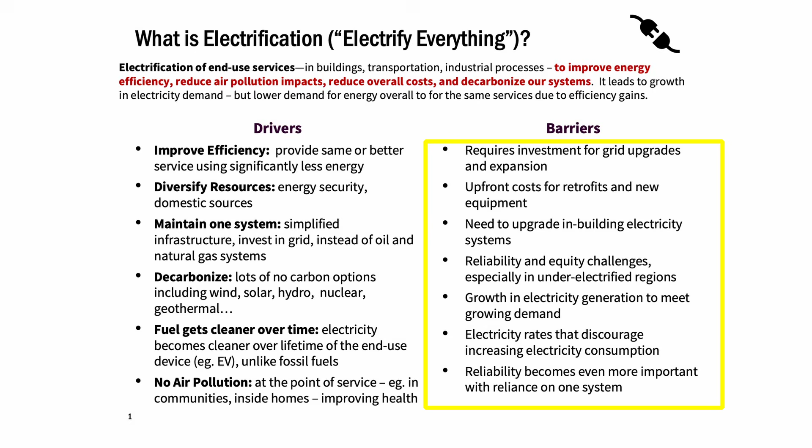We need to have a grid that is able to handle the expansion of demand with electrification, and that includes investment to the grid and investment for electricity generation. You have to do those expansions and upgrades because you're transferring that energy need from the fossil fuel resource to the electricity grid. A lot of times there's a lot of upfront costs, whether that's in the energy service itself or in upgrading the electrical system in a building in order to accommodate those electric appliances. So there's a lot of upfront costs.

Reliability becomes really important in terms of thinking about whether the electricity is available. Now we're relying on one system, so how available is it? Reliability becomes an important factor. And then another barrier is just the costs. Even though you're getting those efficiency gains, sometimes the electricity cost design is not optimal for making this the most cost effective. So it's important to think about how electricity rates are structured in order to encourage all those electrification benefits. We're going to go through all of these.

We're going to do it by going through two examples of electrification: one is heat pumps, and the other is electric vehicles. These are two big ones. I'm just showing you here, kind of thinking about the system.

The heat pump is a way of electrifying your heating services in your home, and heat pumps are much more efficient than natural gas furnaces or electric resistance heaters. This is an important way of electrifying and getting those efficiency benefits we just talked about. Electric vehicles offer the same kind of efficiency benefits through electrification. We now have an integration of all of these into one system with our renewable generation, our grid, and our electrified end-use services.

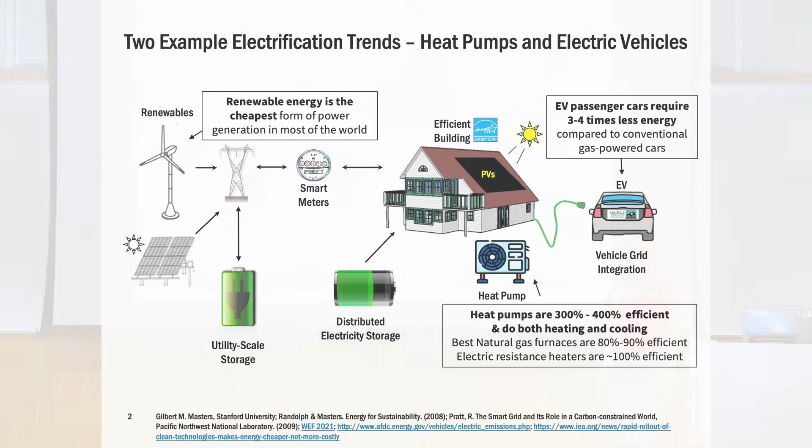So let's talk about heat pumps first. The heating needs for our buildings, both commercial and residential, are pretty significant. Here I'm showing you residential, where space heating is almost half of the energy use in our residential buildings, followed by water heating. Both of those can be electrified with a heat pump, much more efficient than their natural gas counterparts.

I've highlighted a couple other things that can also be electrified. You can use heat pumps on clothes dryers, and you can use things like induction stoves for cooking to electrify those services. You can see how big a piece the heat is, both for space heating and water heating. In commercial buildings, it's a smaller portion, but still significant and still the biggest in terms of space heating of our commercial buildings. It's about a third of the energy in those buildings.

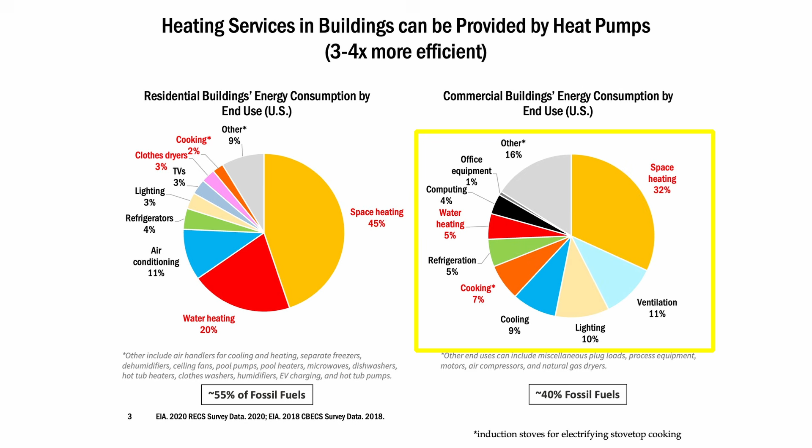So these are the places that we're still using fossil fuels within our buildings that can be electrified through a technology like heat pumps. So how does a heat pump work? I get this question a lot because, one, it sounds magical that it's 300 to 400% efficient. And how can it do it so efficiently?

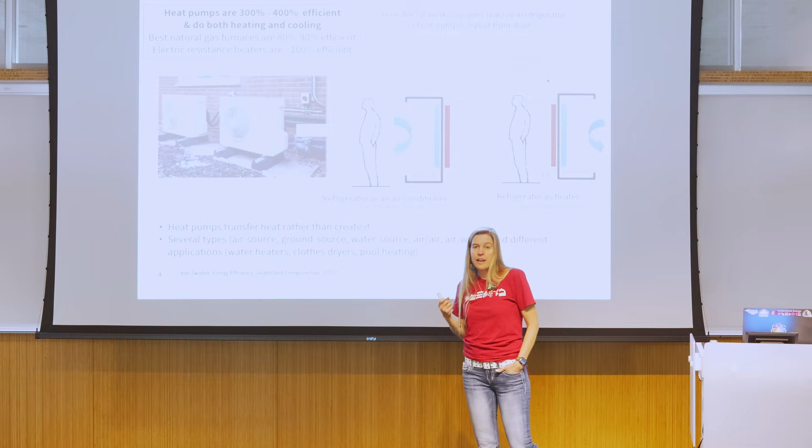The big thing to think about with a heat pump is that you're moving heat instead of creating it. You're taking heat out of a cold space and moving it to a hot space. We already use heat pumps - that's what air conditioners are, that's what refrigerators are. They are heat pumps.

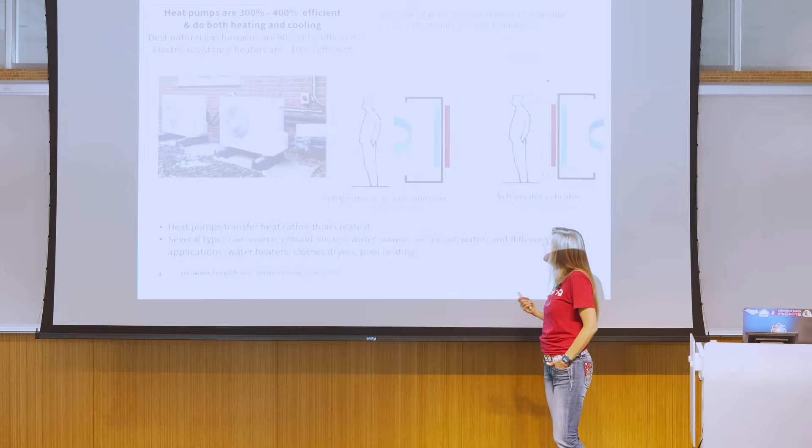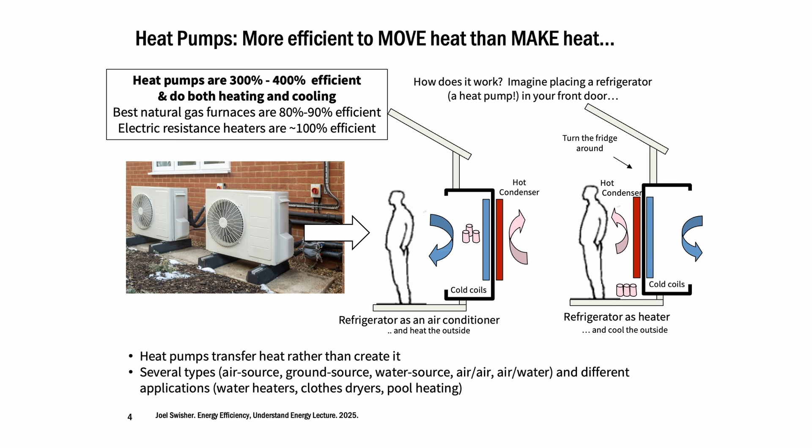If you want to think about a heat pump to heat and cool your space, you could just put a refrigerator in your doorway. If you open up the refrigerator, you're cooling your space. And if you turn it around, you're heating your space, because that's what the refrigerator is doing - it's taking heat out of the cold interior, which you just put your food into, and putting it into your warm kitchen. So this is a heat pump, but at much bigger temperature differentials than we're often using our heat pumps for, because we're trying to cool our refrigerator a lot.

The way that we do that movement of heat using electricity is by using some of the physical properties of a fluid. The important properties of a fluid are that if you compress it, it warms up, and if you expand and decrease the pressure on it, it cools down. So what we use is a refrigerant, just like in our refrigerator, to run this refrigeration cycle for our heat pump and move heat out of the cold space and into the warm space.

If we have a liquid that is low pressure and cold, it will evaporate as it warms up. You think about this liquid as colder than the air outside. So even though it's cold outside, this liquid is even colder. It's going to move heat from that cold winter air into the liquid and cause it to evaporate. So that liquid changes from a liquid to a gas. It's still a relatively cool gas, but it has drawn some of that heat from the outside - now it's a little bit warmer.

It's a gas. You're using your electricity to compress it, to push that heat - and that compresses that liquid, and now that gas is hot. So you compress the gas, it's now a hot gas. And you're taking it inside your building, and that is now hotter than the warm temperature inside your building. So you heat exchange it with the temperature from inside your building. That heat will move into the air in your building, so you're heating that air up.

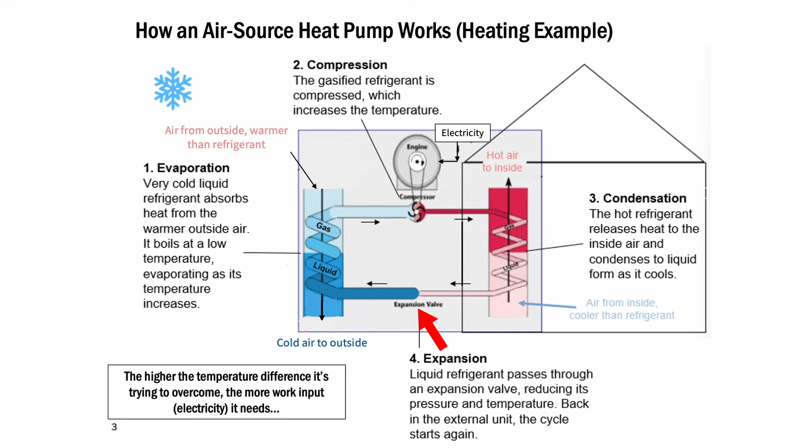As that hot gas gets the heat drawn from it, it becomes a liquid. It's still a relatively warm liquid, but it becomes a liquid. And then you run it just through an expansion valve - this doesn't take any electricity. You just run it through an expansion valve where you're decreasing the pressure on it again, and it becomes this cold liquid.

You can run this refrigeration cycle pretty efficiently with just electricity coming in, compressing and pumping the fluid around to move heat from the cold outside to the warm inside. A heat pump can do this the other way too, switching everything around so in summer you move heat from the cold inside of the building to the warm outside. An important aspect of heat pumps is that the higher the temperature difference it's trying to overcome, the more input it takes. A refrigerator trying to get really cold takes a lot more energy than trying to reach comfortable space temperatures, but it depends on your environment.

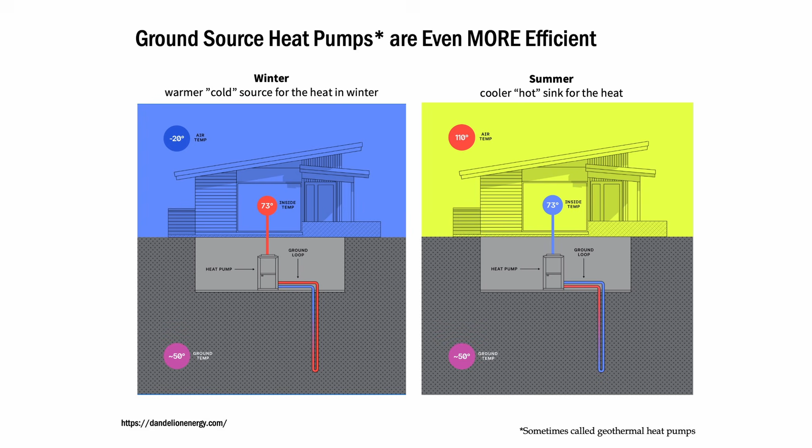You might have noticed I said air source heat pump. There are different ways to think about heat pumps and where you're getting that heat from, and if you can make the temperature difference less extreme, your heat pump becomes more efficient. With an air source heat pump, you're dependent on whatever the temperature is outside. You can also use a water source or ground source heat pump. The nice thing about a ground source heat pump, for both winter and summer heating and cooling, is that ground temperature stays pretty steady year-round, making it a better heat source or sink. In winter, it's much easier to take heat from 50-degree ground than -20-degree air, and in summer, easier to push heat into 50-degree ground than into 110-degree outside air.

A ground source heat pump, sometimes called a geothermal heat pump, is going to be a lot more efficient but also more costly. This is a challenge on the residential scale, but it certainly is an option that can make sense in certain climates.

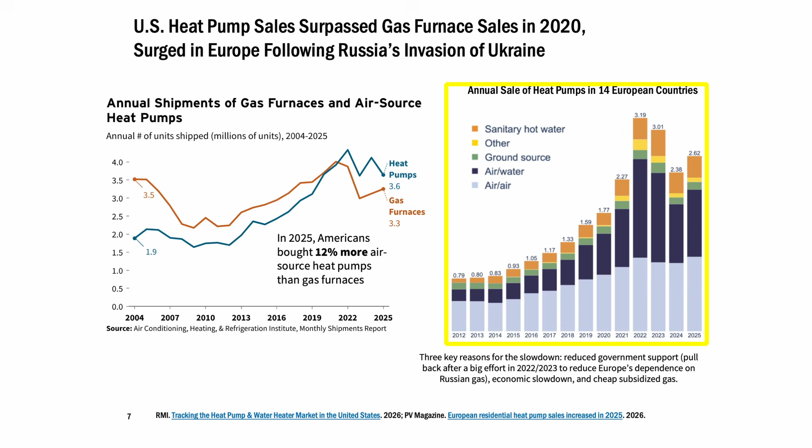So what's happening with heat pumps right now? We're seeing growth both in the US and other locations. In the United States, heat pumps are now outselling gas furnaces domestically, with the crossover happening in the last few years. In Europe, there's been huge growth in demand for heat pumps as there's been an effort to move household space heating off natural gas after Russia's invasion of Ukraine, to decrease dependence on Russian natural gas. There was a huge spike in heat pump demand right after the invasion, and it's still been pretty high in Europe.

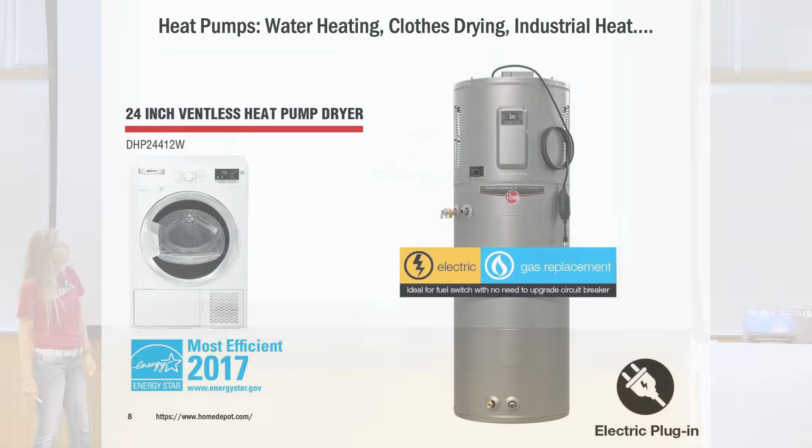We use heat pumps for other things too. You can get heat pump clothes dryers, which is another way of electrifying and making them more efficient than traditional electric dryers. You can also electrify water heating, remember that was the second biggest wedge on our residential chart. That can also be electrified with a heat pump, much more efficient than using electric resistance. So there are a lot of applications for heat pumps, electrifying and improving efficiency.

Other electrification options coming in include things like induction stoves, and of course we've long had electric ovens and things like that.

One of the challenges and barriers I mentioned was the upfront cost for upgrades. A lot of times a residential home won't have an electricity panel or system able to handle the electricity draw from these appliances, so you have to upgrade your panels, which can be very costly.

One innovation we're seeing from vendors is installing batteries within these appliances or within the heat pump, so the battery can serve as a buffer for how much power the appliance draws at any one time. This can allow a homeowner to avoid costly upgrades to their electricity system, because the battery ensures the power draw never exceeds what their system can handle. So we're seeing all these kinds of innovations to handle some of the upfront costs of electrification.

We can electrify all sorts of things in our house. This is an example of putting together the things we've just talked about, and reducing air pollution is one of the big benefits we get. We've seen a lot of studies show that, especially with stovetop cooking which is often around where people are, using natural gas can lead to pretty high indoor air quality problems and human health impacts from the pollutants of burning natural gas in your kitchen.

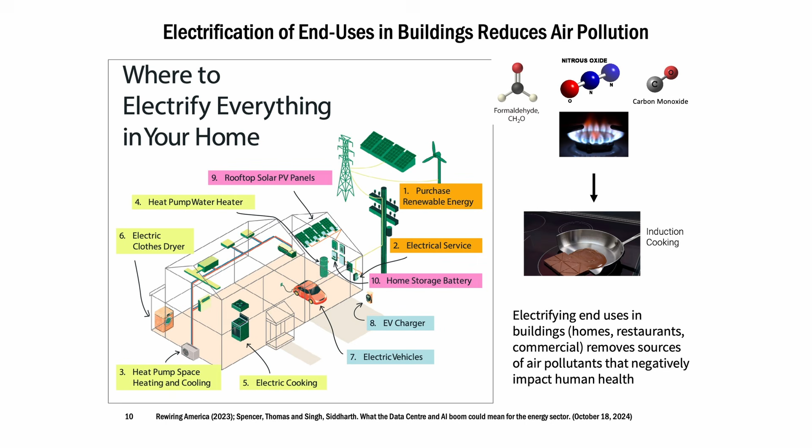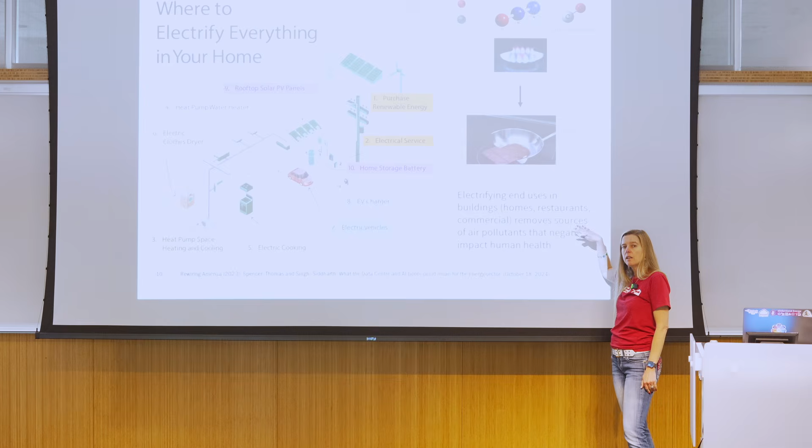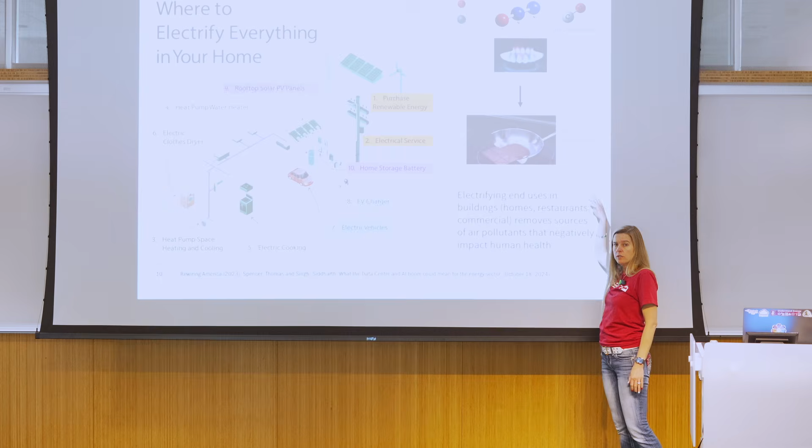Electrification using technologies like induction stoves is really great for removing that air pollution point source. It's really important, and we see a lot of benefits especially in restaurants, where people are working in the kitchen at the stove for long periods of time, every day, 8 hours a day. Electrification is really helping to improve the health impacts from the air pollution of traditional gas stoves.

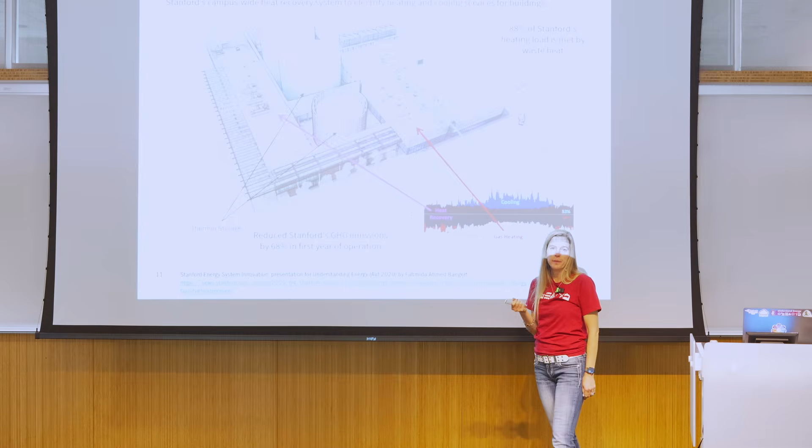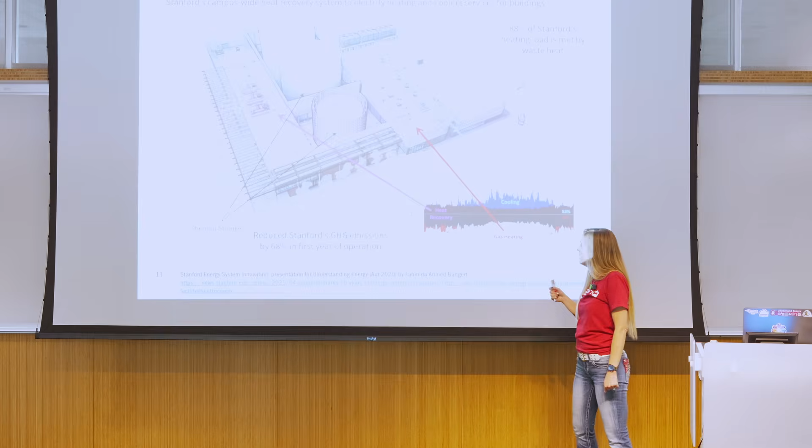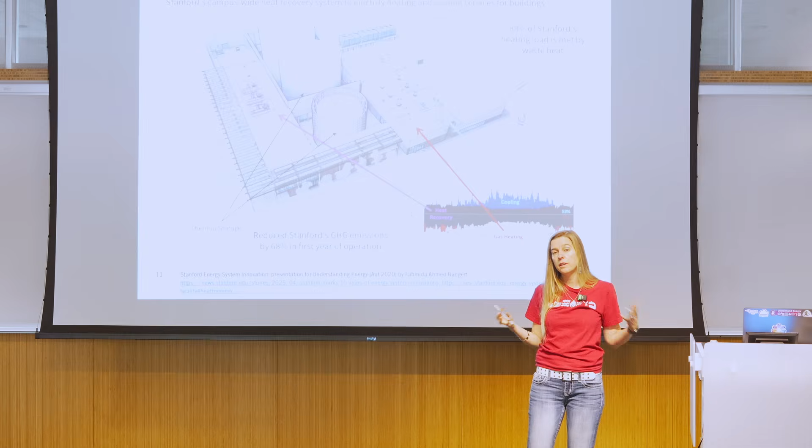Okay, a final example on a heat pump, at a grand scale here at Stanford. About a decade ago, Stanford installed a district-size heat pump where they're using waste heat from some buildings doing cooling to provide heating service to other buildings. What Stanford found is that buildings required both heating and cooling all year round, depending on the type of building, whether it's a hospital, a data center, or a lab space. They were heating and cooling buildings all year round, so there was an opportunity to move heat from the buildings you're cooling to the buildings you're heating. They did this at a scale that hadn't been done before at the time. This is called our central energy facility.

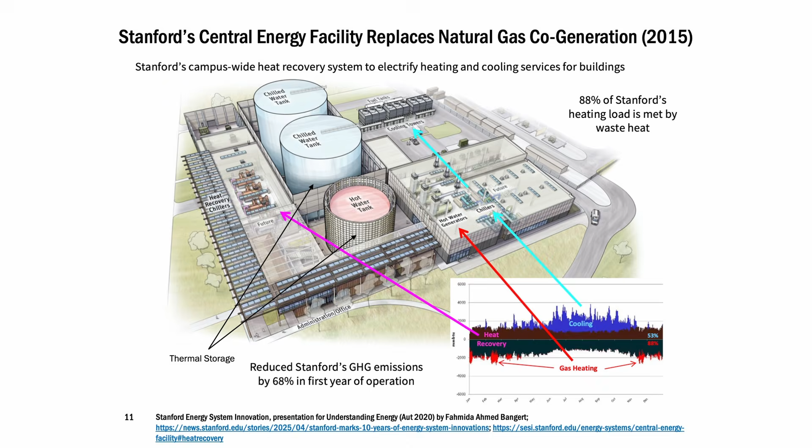There's kind of two big things. One, this is using waste heat to provide that service, so it's much more efficient, doing it like a giant heat pump. Two, they also have thermal storage, both cooling and heating, and that allows Stanford to be flexible about when the heating and cooling service is happening and when they have that heat available. So that thermal storage gives you flexibility in terms of nighttime and daytime and allows you to really meet this demand.

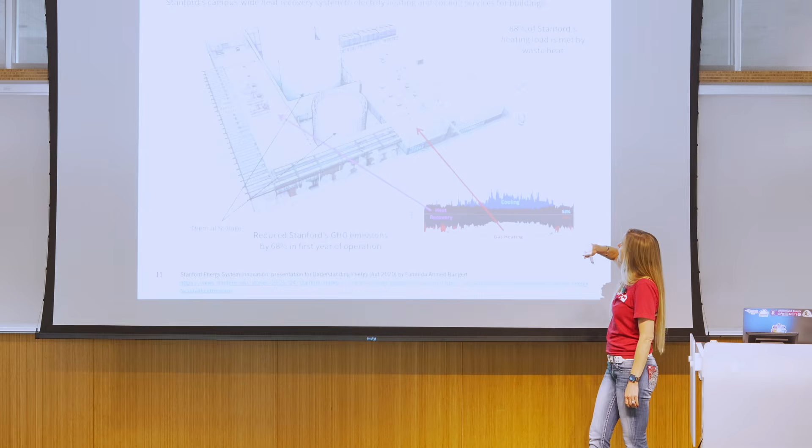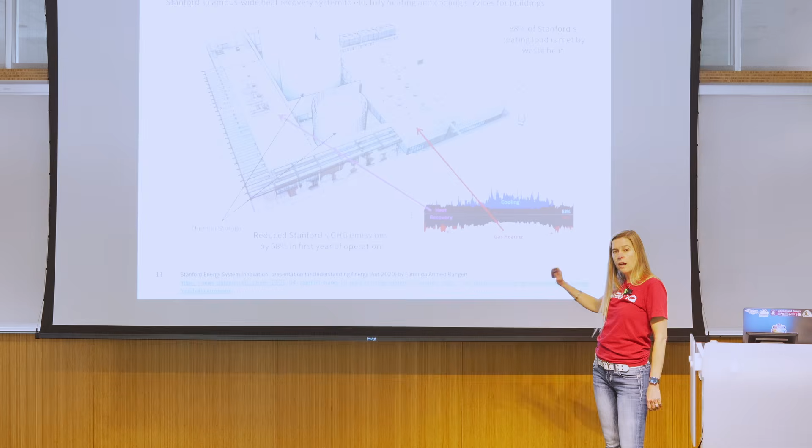Almost 90% of our heating load is now being met by waste heat at Stanford, and importantly, this really dramatically reduced Stanford's greenhouse gas emissions. So it can be done at the household scale, the building scale, or at the district scale in terms of heat pumps. Okay, so that's what I wanted to tell you about heat pumps.

I told you I would tell you 2 electrification stories. So now I'm going to tell you about electrification of transportation.

Electrification of transportation provides a lot of benefits, which we talked about. I often get asked, doesn't it matter what the electricity mix is on whether there's a benefit from an electric vehicle or not? The answer is yes, but the electric vehicle is so much more efficient that even on a grid powered by a coal-fired power plant, you would still get a benefit compared to its gasoline counterpart. And like I said, you own that vehicle for 15 to 20 years, so that grid, that fuel, can get cleaner over time as you go.

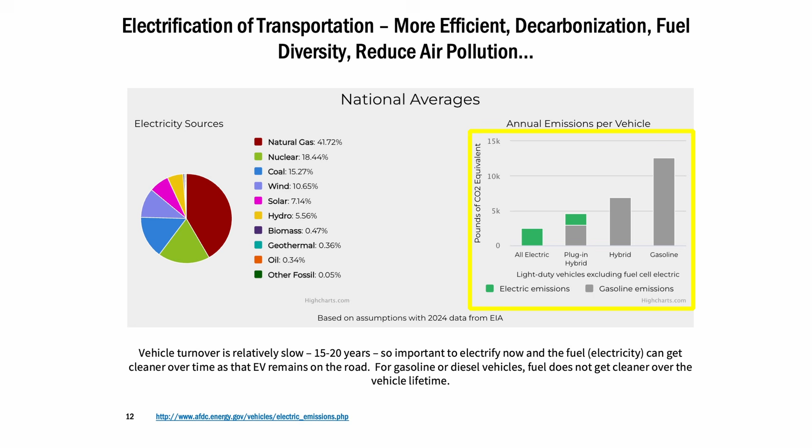Here I'm showing you the electricity mix just for the United States. This is a government website that shows how that electric vehicle powered by the average grid in the US would compare to its hybrid or gasoline counterparts. You can see even with a grid that's not decarbonized, you still get a lot of benefit in terms of greenhouse gas emissions for your electric vehicle. A big reason for that is the efficiency, it being 3 to 4 times more efficient.

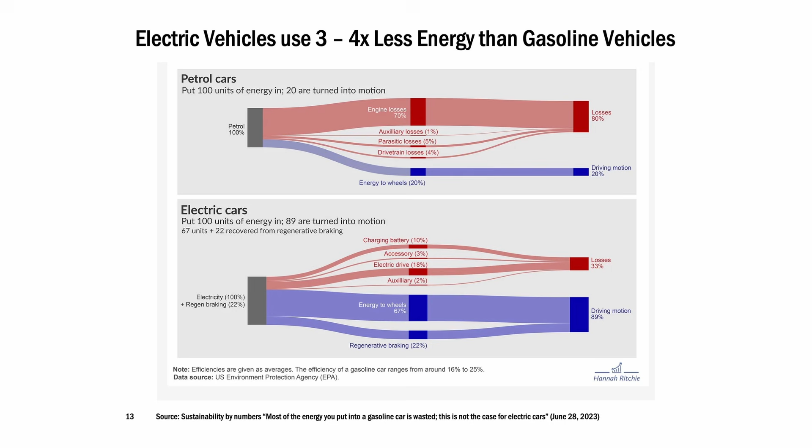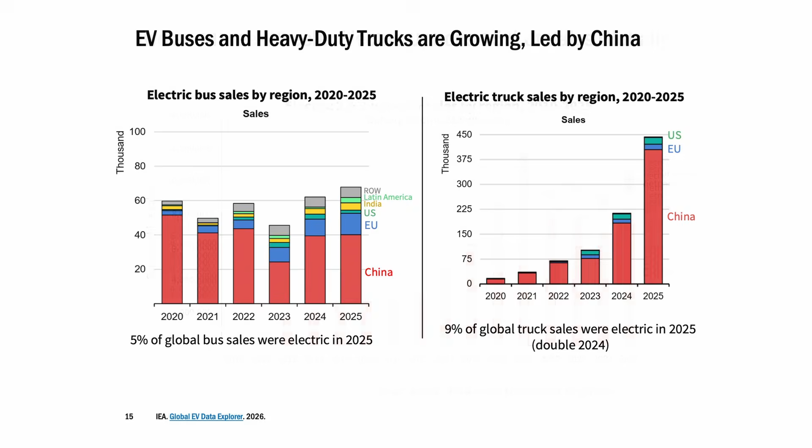Two-wheelers and three-wheelers, which are important in many countries, have seen a lot of growth in electrification. This is actually for on-road transport, and it's the most electrified segment in the world.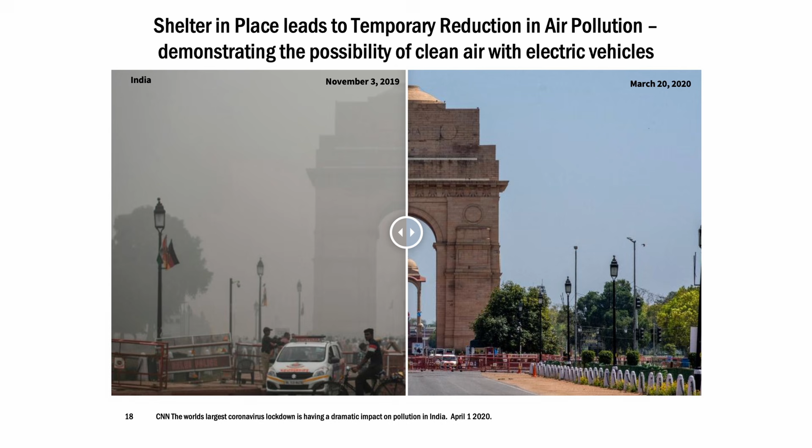What can that air pollution reduction look like? I think one of the things the pandemic really showed us was what cities could look like without air pollution. This is just one example in India, showing what the air pollution looked like on a typical day before the pandemic, and then during the shutdown. This is the possibility we're talking about by electrifying these end-use services.

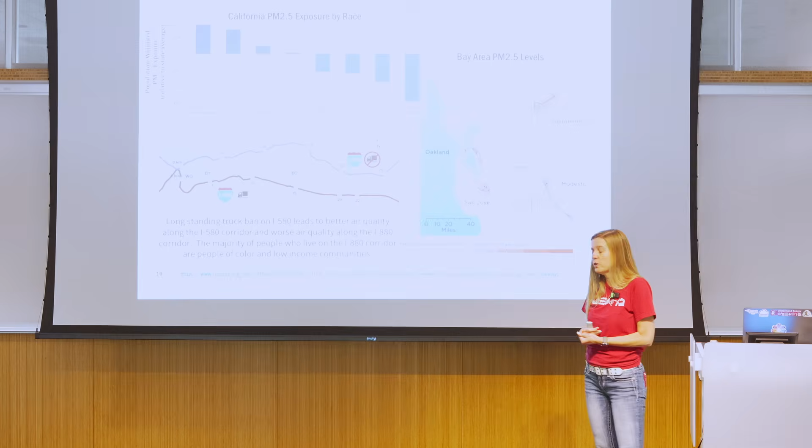Much of the pollution a lot of times is from our transportation systems. We also see disproportionate impacts from that air pollution, which again would benefit from electrification. I'm showing you here just one local example, but we see this everywhere, where communities along our transportation corridors are bearing the highest burden of air pollution from our transportation systems.

In particular, the particulate matter coming from our diesel trucks. So electrifying our trucks is a really important aspect of electrification in order to reduce some of these air pollution impacts. Here I'm showing you where the pockets of significant particulate matter air pollution from on-road vehicles are in the Bay Area.

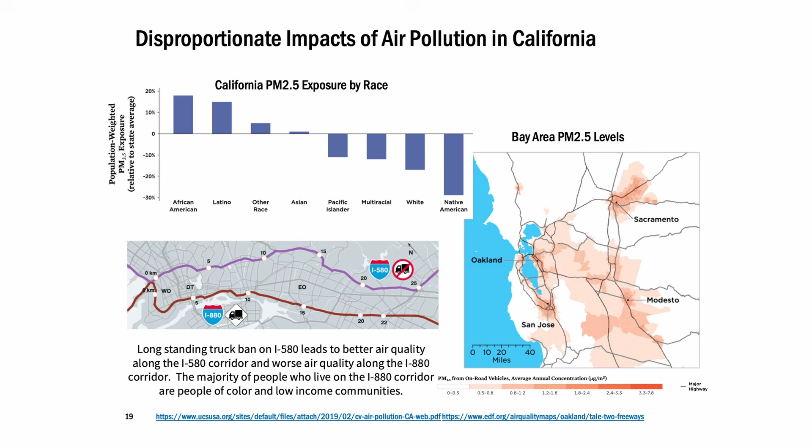It's really those highway corridors, which happen to be a lot of times our communities of color and our low-income communities. And so that contributes to this disproportionate exposure and impact for those communities from the air pollution from our transportation systems.

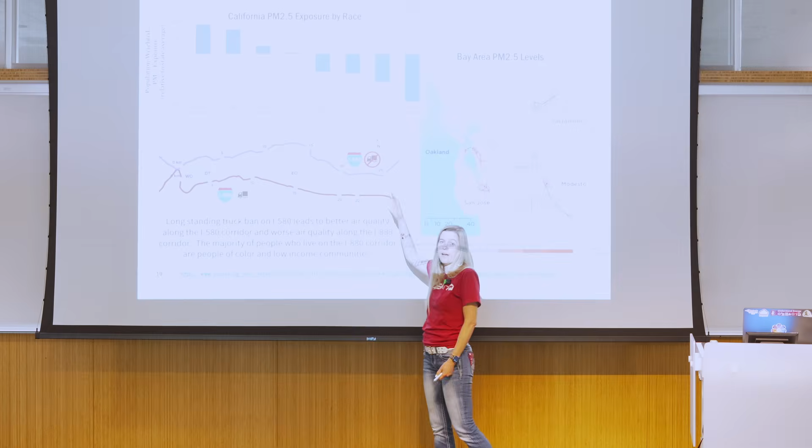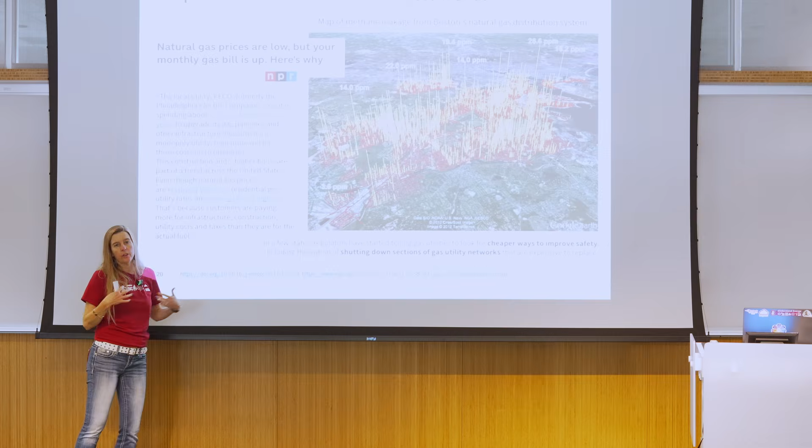Finally, I talked about how we could just have a single system that we are investing in for electrification. So instead of investing in both our natural gas system and our grid, we could just invest in the reliability of that one system.

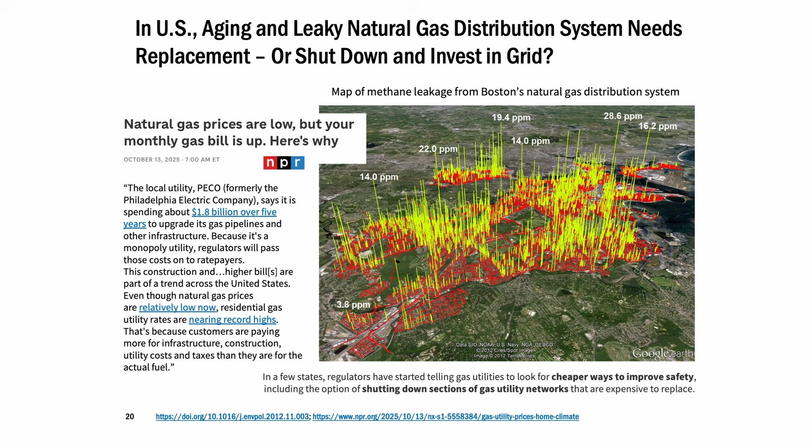This is just one example - there are many, many examples to think about - but in the United States, our natural gas systems are aging just like our electricity grid, and they need upgrades. So there are some places thinking: is it worth that investment to upgrade both of these systems, or does it make more sense to electrify our end-use services and just invest in that one system?

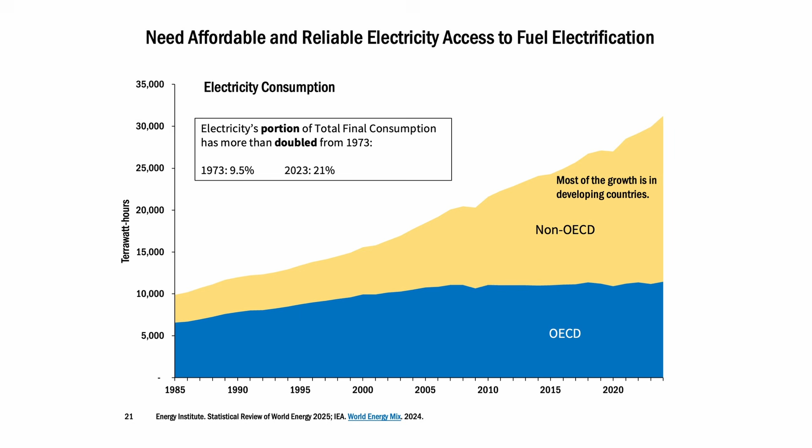But there are challenges. We need affordable and reliable electricity access in order to provide these services in an electrified manner. We are still trying to grow our electricity system to meet the demand we already have, and although we are growing that electricity access, we are also growing population in areas.

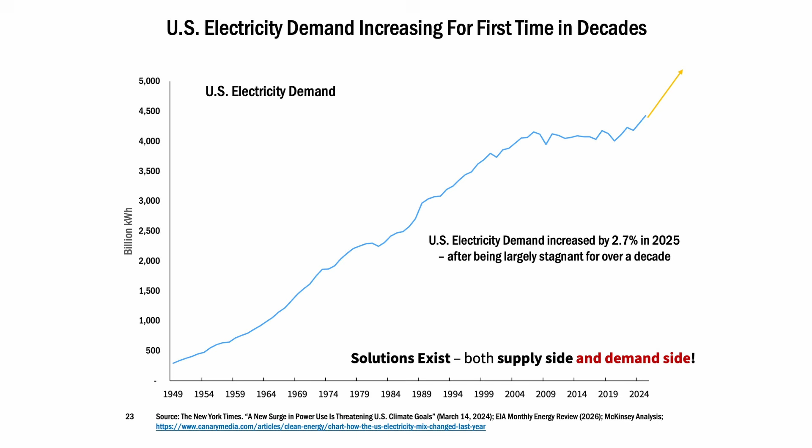In the United States, we are seeing electricity demand grow for the first time in decades. A lot of that is driven by data centers and AI. But you can think about if we are also doing fuel switching from our natural gas and oil systems to our electricity system, that is also going to increase our demand.

And so we have to be smart about when, how, and where we're adding this demand to the grid, because there is spare capacity - it's just at certain times of the day and certain times of the year. We have both supply side and demand side ways to do this in an affordable and equitable manner.

This is true globally as well, and so the reliability of our electricity systems becomes more important. Outages become important, and we're seeing continued strain on our electricity grid because of climate-related weather events, which also impacts the reliability of our electricity system.

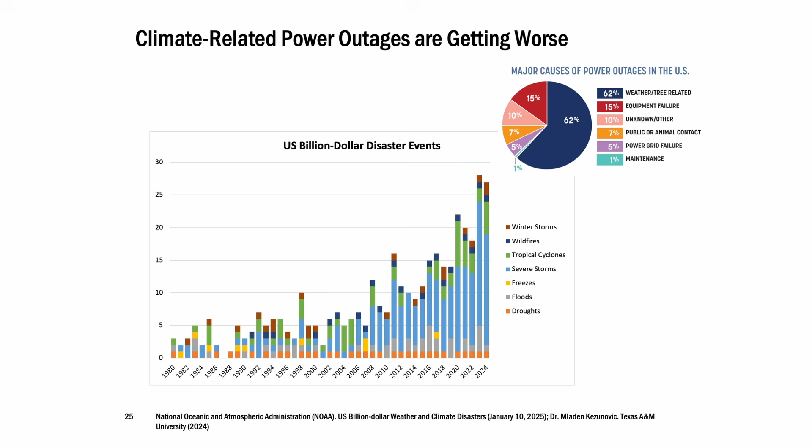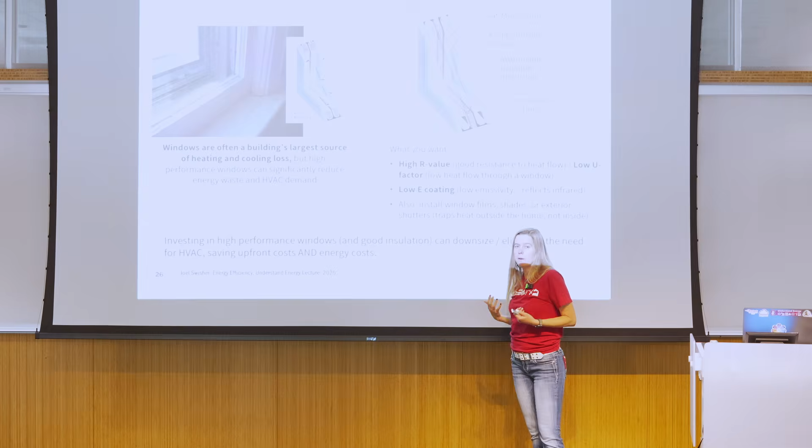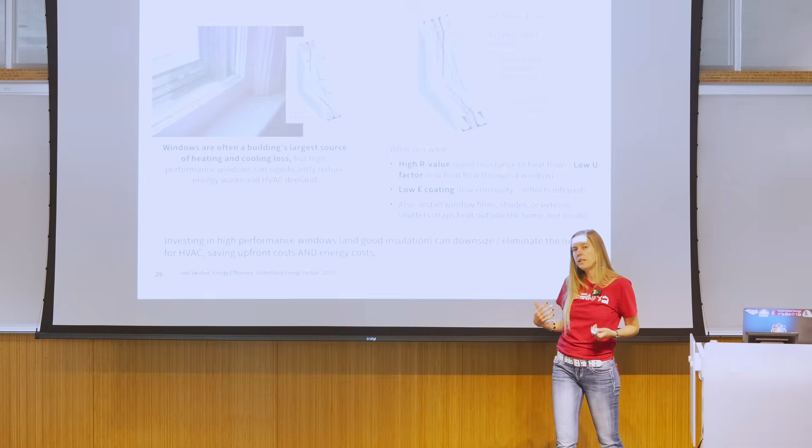Some of the things we can do in addition to just hardening our electricity system is also design our buildings to be able to ride through these power outages. If we make our buildings as efficient as possible, they can ride through temperature changes and electricity outages without changing a lot of the comfort of the inhabitants, and without having huge demand spikes when you have an unusual cold snap, for example.

This is just an example of windows being an important part of that, but there's a lot we can do in making our buildings more efficient to be able to ride through these outages.

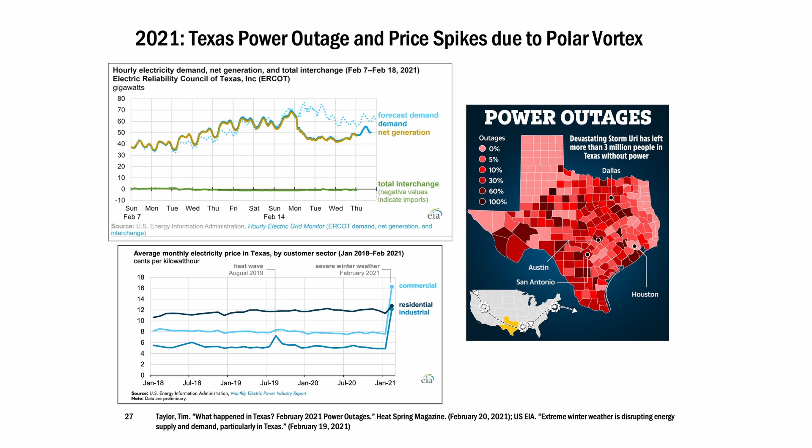One example that was talked about a lot here in the United States is the 2021 polar vortex in Texas that led to widespread power outages and price spikes in electricity for those that still had access. These can be life-threatening weather events if you don't have the right infrastructure or efficient buildings to protect human health and life through these events. So it's an important aspect in thinking about reliability and electrification of our end-use services.

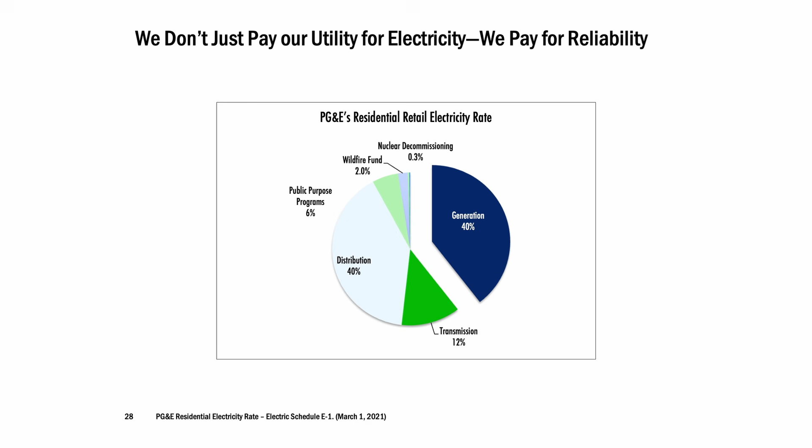It's also important to think about how we pay for our electricity. In the United States, in our electricity bills, we're not just paying for the energy providing electricity for our services, we're paying for the transmission, the distribution, the reliability of our system. How we structure these for customers is really going to impact whether our electricity system and costs are shared in a fair and equitable manner that supports electrification and all the other benefits we've talked about. So how we set up our pricing for electricity is really important.

Now, taking a step back and looking at the global scale again, when we're thinking about electrification and the energy security aspect of electrification, remember we diversify our resources. Through electrification, we can also reduce our reliance on a single fuel. That gives us a lot of energy security benefits and allows us to supply some of our end-use services with domestic resources.

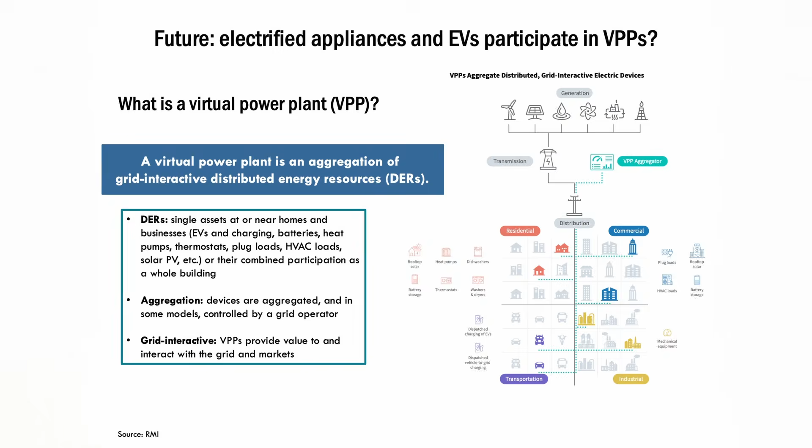What you're doing is aggregating your electrified services and allowing flexibility on when that demand is happening, and that provides a benefit that is actual cost savings to yourself, or a benefit that the grid is willing to pay for in terms of reliability. So a virtual power plant is an aspect where people can actually get paid for allowing flexibility on when they have those electrified services happening.

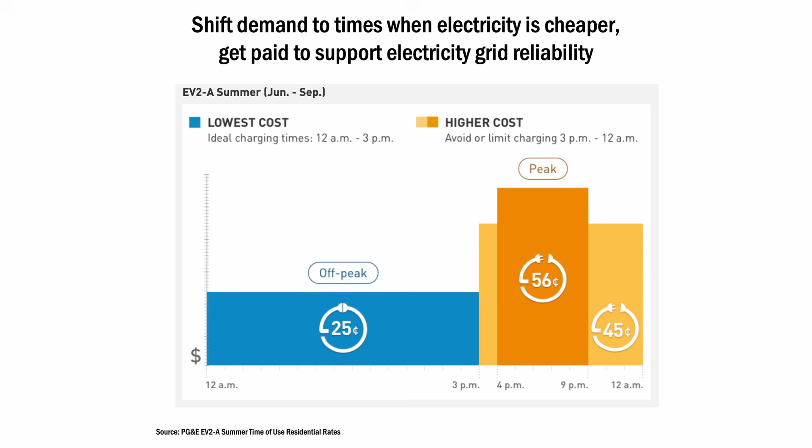So just giving you a sense of what that looks like. This is a residential cost rate from our local utility, showing that in California during the day is when our electricity is cheapest. We have a lot of solar that is really low cost or zero on the margin. So this is when they want electricity to be used, and not in the evening when the sun has gone down. That's when electricity gets really costly to supply.

So a virtual power plant and aggregating those services can actually help move the electricity demand to this low cost time and pay consumers for that service. So it gives these additional economic opportunities.

Finally, big picture: decarbonization is happening, electrification is happening, decarbonization of our power system is happening. We're seeing electricity share grow as part of our total final energy consumption, that's electrification. And we're seeing our renewable share of electricity generation grow. We want to continue to grow both of these things in order to decarbonize our systems. So the questions are, can we continue to grow electricity access faster? And can we continue to decarbonize our grid faster than we're electrifying?

And even if we don't, even if there are some bumps along the way, remember that you're keeping that car or that heat pump for decades, and electricity can get cleaner over time. So electrifying now still makes sense, even if we're not decarbonizing our electricity grid as fast as we're electrifying. But the good news is that solar and wind are our fastest growing energy resources, so we're continuing to accelerate this decarbonization.

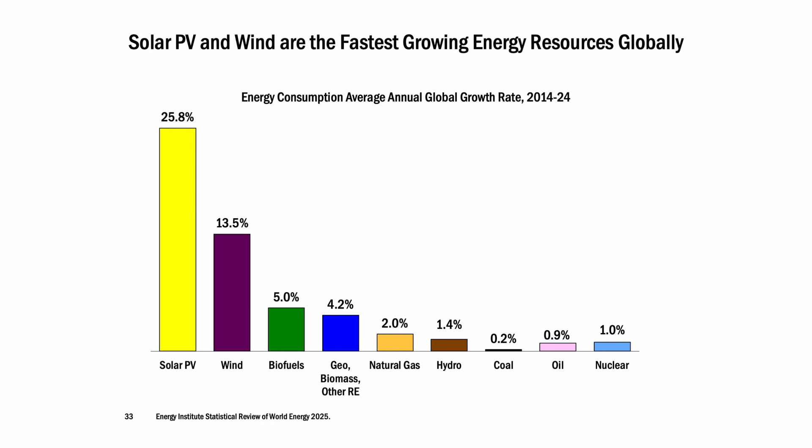Okay, I hope that helped you understand electrification and what people mean by electrify everything.